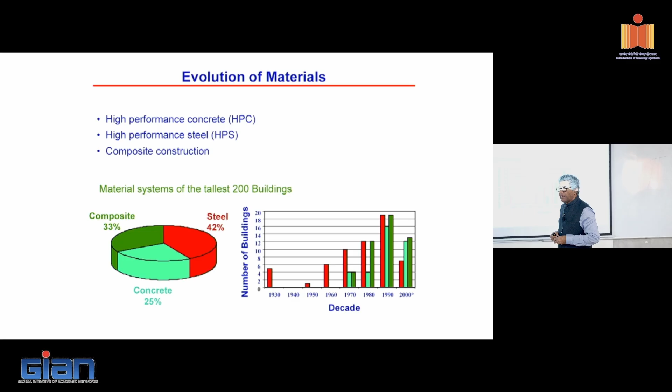Now we'll move on. You all know about the evolution of materials. We have been talking about normal concrete and high strength concrete. Now high strength concrete is dethroned. Nowadays the buzzword is high performance concrete, and high performance steel composite construction.

These are the materials which are powering us to construct tall buildings, because they get more and more loads and need to be able to take them. Tall buildings have the usual dead loads and live loads, which I think all of you have been taught about. But tall buildings also bend, due to the wind.

Take the Burj Khalifa, earlier Burj Dubai. That structure bends by about 1.25 meters at the top level, and daily it swings. For about 160 stories it is made of concrete, the remaining 80 stories made of steel, because steel can give the performance for ductility as well as fatigue. Considering those considerations, we went for steel for the upper structure. After the building was built, we kept some people within the Burj Khalifa structure on every floor and made the structure move like this. It has virtually moved right up to the top level.

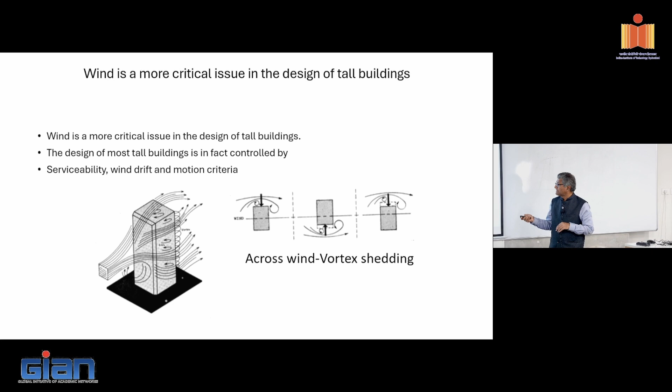That is the performance of the structure. Having known this, we need to know much more about the wind performance of buildings. The wind vortex phenomena take care of much of the behavior in tall building structures. I'll just give you brief information, not go much into the details, since it won't be possible to cover.

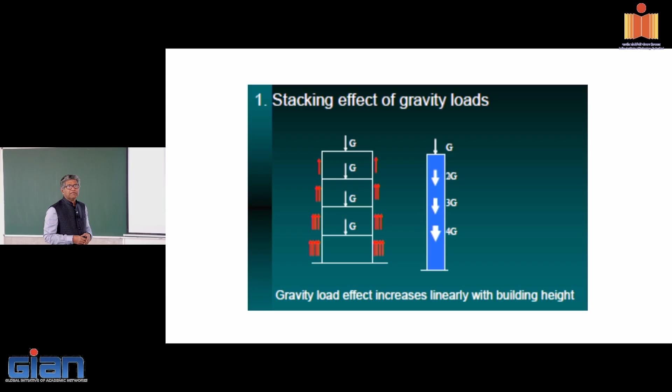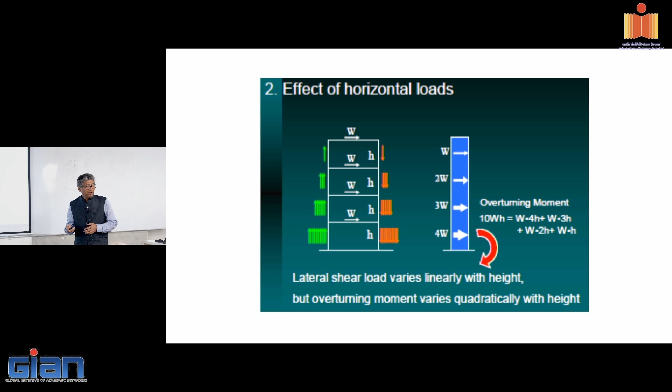For any tall building we design, we normally know what loads are coming up. In spite of all the computer analysis, we estimate what load is going to come down, and what the earthquake load is, taking it as a stick model with the summation of flexural rigidity EI values. We put the stick model, apply the load as a cantilever, and understand what moment we are going to get, what deflections we are going to get. That will nearly match the computer result, with about a 10% difference. That's what we do in all the structures.

And everyone knows about the shear walls criteria, besides the columns and all, because shear walls take the brunt of the wind forces and the earthquake loads.

That's the reason why we go for shear walls. I will show you some of the buildings in America or in Dubai, where I have worked for about 15 years, and how the buildings have come up.

Most of the time, if we talk about a 70 by 70 or 80 by 80 building, they will usually have a lift and stair core in the center, and then the peripheral columns, connected with outriggers if there is a necessity, otherwise it's not required. This is how tall buildings come up, and Burj Khalifa is how the whole structure is made, with buttresses as we call them.

If wind force or earthquake comes up, these shear walls will take care of it. The central core itself also has shear walls which are able to take the load. This is how the whole structure is done.

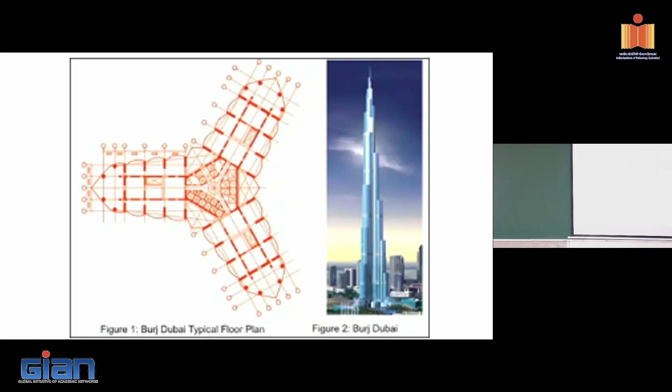But to give you the information, while the structure steps up and down like this, all this is taken care of by about 50 wind tunnel tests carried out at various levels. Because of the wind tunnel test data, the analyst comes and says vortices are forming, eddies are forming here or there. Every time the structure goes up, we try to stop it there and take it further, and he advises to raise the other side. We kept increasing like that, reducing the sizes.

All of us know that above 250 meters, no code in the world covers the building, no codal provisions. It's all done with wind tunnel tests, and we went ahead with the design of this particular one.

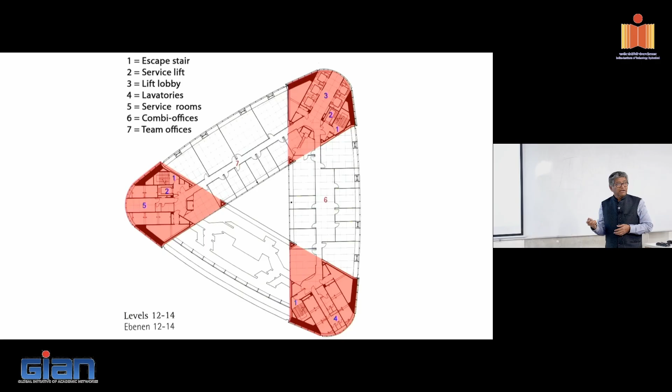You can also see some irregular shapes of buildings coming up. Even here, we have managed with shear walls to take care of the lateral forces due to wind and earthquakes. So that's a brief idea of what shear walls are and how they work. I'll now briefly run through the various technologies ongoing in the country.

Predominantly this is the one now being adopted by developers - monolithic construction. This monolithic construction is called Mivan construction, because Mivan is the fabricator who started supplying aluminum shuttering from Malaysia. That's how people started calling it Mivan, similar to how we call photocopying 'Xerox'.

And then we have insulated wall panel construction using shotcreting of concrete, light gauge steel or cold form steel construction, precast, prefabricated, and composite construction. I'll just run through this very briefly.

In 2010, we designed structures for the Bangalore Development Authority, stating there is no need for brick masonry. We convinced them to construct a 10-story building and a 6-story building with various thicknesses of walls. The beauty of this is you can pour the wall and slab together on the same day.

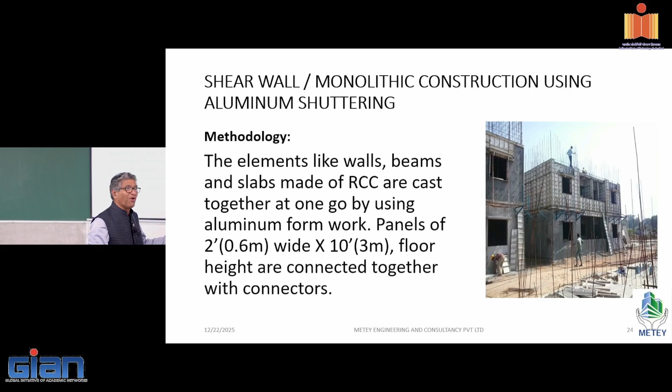It's self-compacted concrete, that's the beauty of it. There's no need for plastering later on. These walls are called load-bearing RCC walls, and they're as good as shear walls - they take the forces of wind and earthquake as well.

This is how we convinced the AP state government to build EWS housing under PMAY with this monolithic construction - they built about 3 lakh houses, and you can see these beautiful houses. We also advised them, similar to IIT Hyderabad, that there's no need for painting, but they said people still need to reach the stage of acceptance, so it's better to do the painting. That's how we did the painting on this.

For all these buildings, we raised the bar of specifications by providing vitrified tiles and UPVC windows rather than normal buildings. So we told the Chief Minister, let's stop constructing ghost houses, let's build durable houses so people can stay in them and remember your name for generations. That's how the buildings have come up.

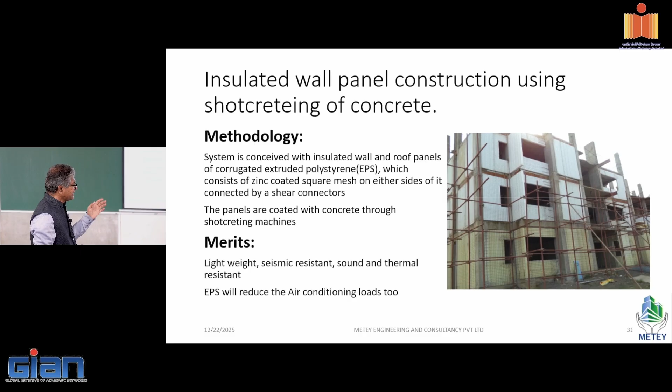They are the steel manufacturer, building a structure using this particular polystyrene with reinforcement on both sides, impregnated through. We said this can be used as a shear wall itself, an RCC wall. We demonstrated and tested it, and it worked fantastically well. With this, they have built 4-story structures with the help of this technology. You can erect it, and after shotcreting and painting, you don't see the difference at all. But there is a massive 4 degree centigrade temperature difference between outside and inside in summer. That is the beauty of these structures.

Light gauge steel, again for Jindal Steel and Power Projects Limited, JSPL, for their employees housing in Raigarh, we have built a 4-story cold formed steel structure, putting rock wool inside and then cement particle board.

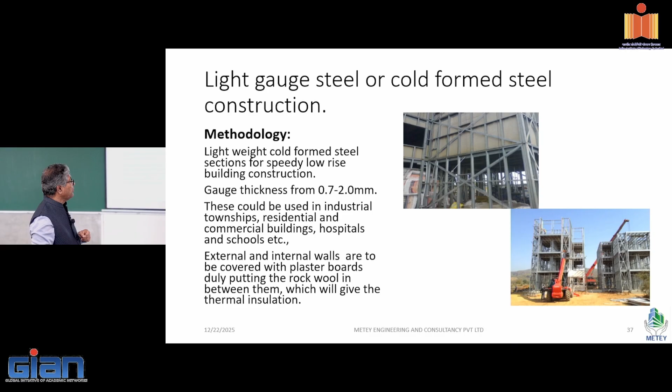Abroad, when you look at these buildings, they put some 2 layers of plywood as a flooring unit, but it gives sound when you walk on top. So we decided to put a concrete slab on top by using a deck sheet. That's how these buildings are built. You can also see this is the bracing with cold formed steel. Cold formed steel is usually used up to 0.7 to 2 mm thickness, with channel sections, and then cement particle board on either side with rock wool inside, which gives sound insulation as well as fire insulation.

And then composite construction. This is again a well-known concept. America and other developed countries do a lot using steel instead of concrete - steel columns, steel beams, and then the deck sheet, and on top of that, concrete.

Instead of this, now we have started putting the precast hollow core slab also. Instead of the deck sheet, we started putting the hollow core slab on top of the beam. I will show you some more ideas which have come up, called delta beam, where we are putting the hollow core slab at the bottom flange, even giving you optimization in space.

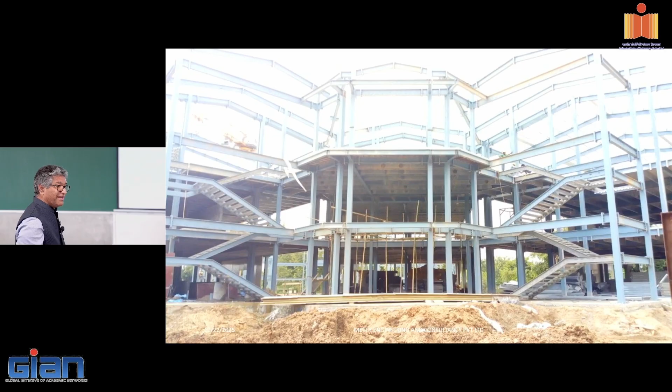So this is how we built one structure in Numaligarh, in Assam, where people wanted the building in 6 months, for both a nursing college as well as hostels. There you have the refinery there, right.

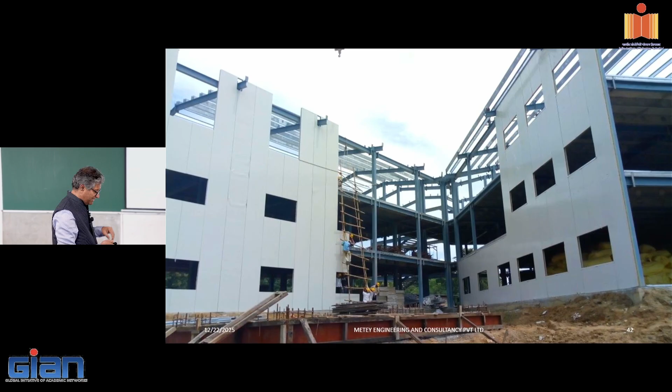Nursing college and hostel, we built this building, and they wanted it in 6 months. So we constructed this - you can see this is a 12-meter high dry partition, no concrete or anything. You have rock wool inside, and it's a galvalume sheet on both sides. We fixed this 12-meter panel, made in the factory in Delhi, shifted out to Numaligarh, and simply fixed it - 12-meter height at a stretch. This is the beauty of it, but it's totally a drywall construction. We have used only brick masonry in the toilets, because in the toilets it's not a good proposition for drywall.

And then there is another smart guy, a postgraduate from ISB Hyderabad, who thought of doing something different in construction. He took me once to Australia to see what is called perma wall form construction, which is coming up. This is made with plastic - you have this plastic sheet on one side and the other side, and then you put particular ribs inside. This is also a technology which has come up. We have already built some, and he is doing quite a good number of buildings for Mahindras in Chennai right now by putting up the fabrication there itself. What you do there is this PVC form remains in place.

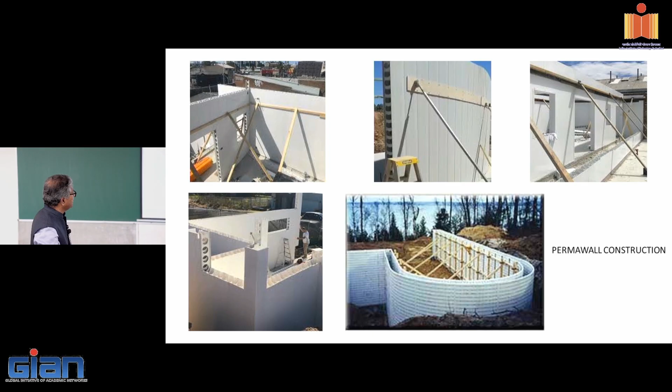Whatever color you want, you are just pouring concrete and putting the reinforcement into that. It acts like a shear wall, nothing bad. So it is a stay-in form, and the concrete can be poured into that. These are the different ways in which you can build this. I've seen in New Zealand and Australia a lot of construction going on with this, and it is picked up in India also.

Glue laminated timber - anyone know about this? The name itself says glue is added between the timber pieces. By adding this, you can make a timber beam of size you want - 1 meter, 2 meter, 3 meter. We have designed one big shopping mall of about 100-meter column free space with the help of glue laminated timber, making a big truss. What you are seeing here, we have made a 100-meter glue laminated timber truss. There is a beauty to it.

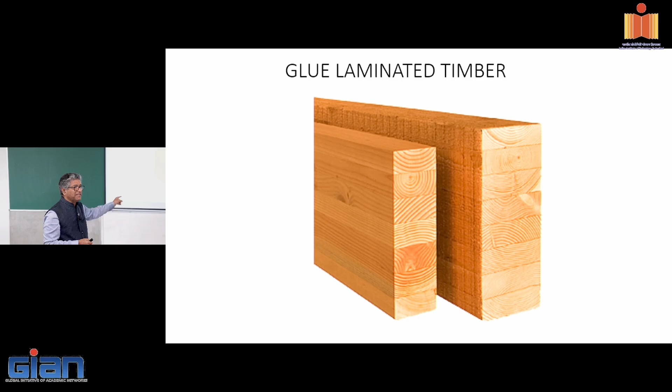For the Indian tropical weather, how is it suitable? Some chemical treatment has been done. New Zealand people will ask what treatment you need and how long it should be maintenance free, and they do the treatment and send it. Each piece is 45 mm, glued together with a strong adhesive, fantastically glued together. Thereby they are getting about 17 to 20 Newton per mm square flexural strength, whereas our teak wood maximum takes about 5 Newton per mm square - increased to 17 to 20 Newton per mm square, which is a fantastic value.

Using this glue laminated timber, churches are built very much in Europe, and swimming pools are also built. We have designed some swimming pools and structures, bridges in Dubai at various locations, and resorts and hotel places like that.

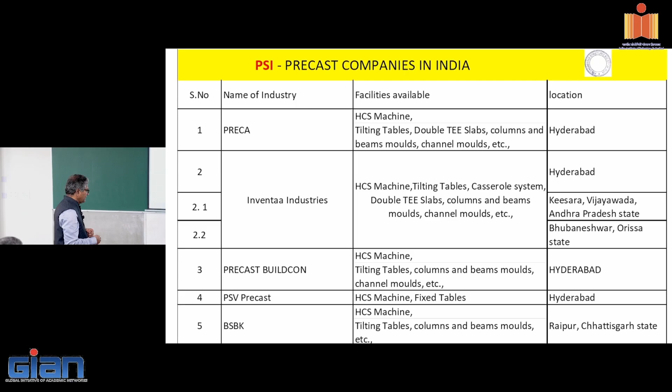In India, what is the issue regarding termite treatment? This is termite treatment - chemically treated and sent such that the termite cannot penetrate. The specifications exist. Most termite treatments are limited to 5 or 10 years only, right? No, here they are giving a guarantee of about 20 years. So New Zealand specifications ask you how long you want this.

We have to specify what the maintenance period is also. One important thing - while working in Dubai, whenever the client comes to our office, we ask him first, by giving a checklist, what is the first maintenance period you are looking at - 5 years, 10 years, 15 years? If he says 15 years, we choose the material accordingly; if he says 5 years, the material will be less costly. That is what is missing in India - that is what we should be doing. There, of course, they're much richer guys, they can pay for it. Some people will say 10, 15, or 20 years - thereafter you can forget about the building and touch it only for maintenance. That is the way we provide the specs, and then he signs on that.

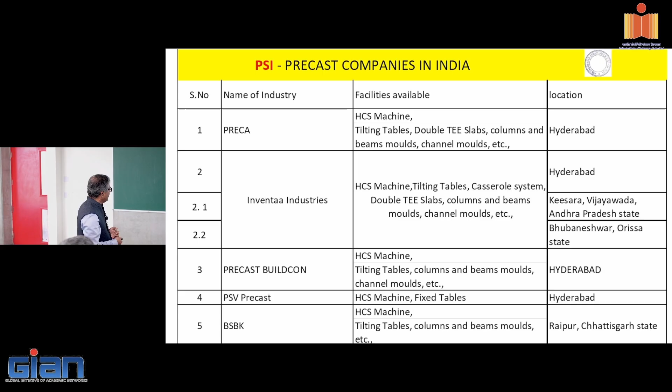Now we'll come to precast. With our effort through the society, we have seen that about 50 companies have come across India - that is what we have done from our side. So many companies are there across India like this, and some developers have also set up for them, like Sobha developers, Brigade developers, My Home in Hyderabad, like this.

So what is the beauty of precast? The beauty of precast is large column free space. We can provide floor slabs for about 15 to 20 meters long - that is the beauty of it. These pre-stressed precast slabs, solid or hollow core, are different slabs as we are going to see now. That gives us a fantastic column free space which is needed for shopping malls, office complexes, and all those. Here you can see this is a double T slab in the shopping mall.

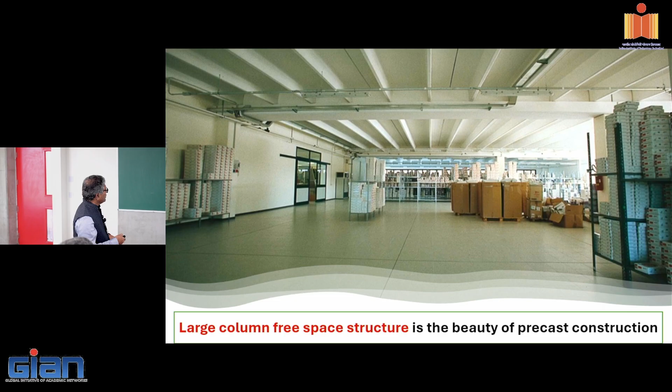It is also extensively used in parking structures, such that car parking becomes easier. The beauty is that I could see a column here at 10 meters, but this span is about 25 meters, with a double T slab. That's the beauty of precast, so that the architect can provide the racks wherever he wants.

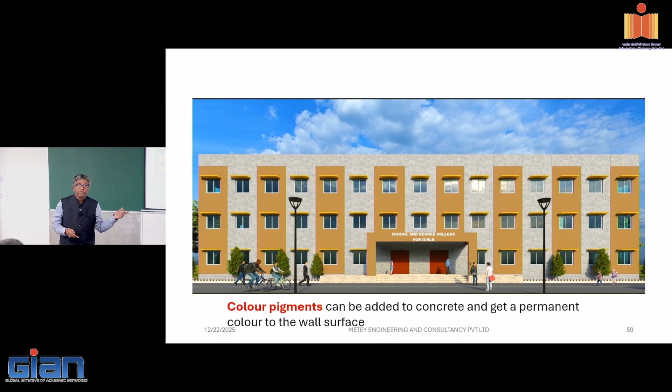Now we are also putting coloring compounds, so we can do the precast with whatever color you want. Abroad, the facade elements are most of the time done with color. There is a beauty to it, no need to do painting, right? So this is how the mushrooming of buildings in Dubai has come with precast technology.

While I was there in 1995, from 1995 to 2000, even a 30-story structure was taking about 6 years to build in Dubai. By 2000, even a 60-story structure was being built in about 2.5 years. That is the result of precast. In 1995 they were predominantly using conventional construction, putting up formwork and all, which was taking time. By 2000, precast companies had come from abroad and set up, and the mushrooming of structures came fantastically. There is the beauty of the advent of precast.

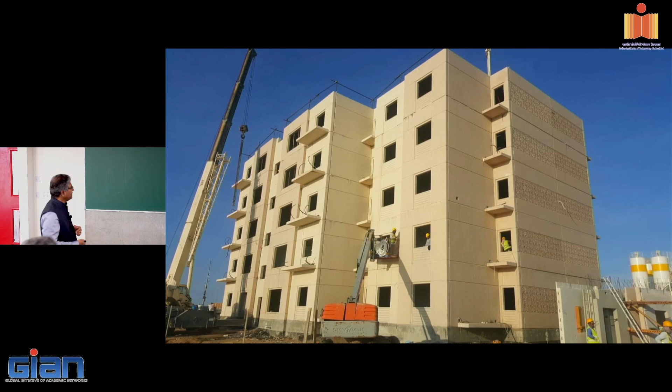Now this is how buildings are built abroad with beautiful coloring compounds. You can see the beauty of it. It looks like some stone has just been brought and put there. That is the beauty of the precision and quality of precast buildings built there.

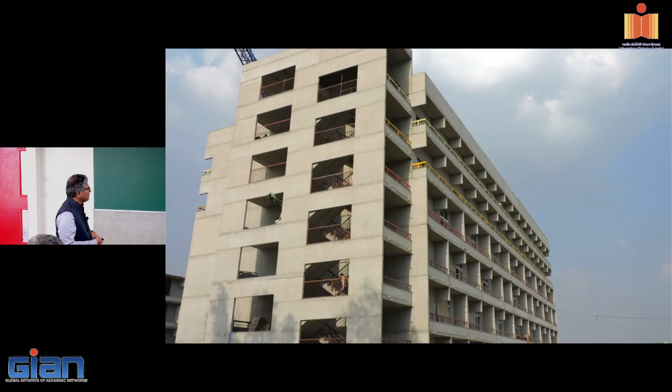Connecting to that, in India also we have built this - you can see this is the Jindal University at Sonepat. What the architect has done here is similar to IIT Hyderabad: he has exposed the concrete as it is, and only put color on the railings.

This is how the interiors of the corridor look, but only inside the rooms have they done some painting. Other than that, the gray concrete color surface itself is good enough, and concrete is most impermeable - water will not penetrate, so there's no need for plastering. That is the beauty of precast.

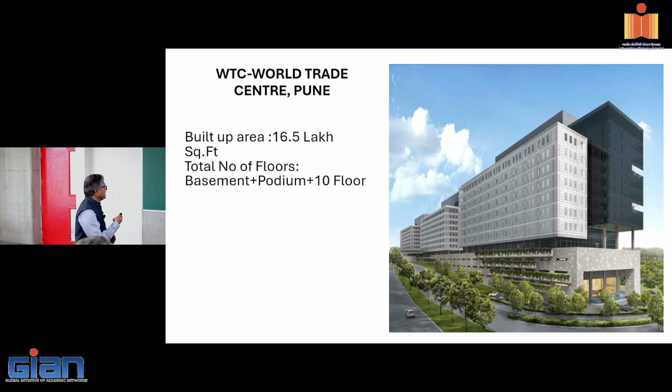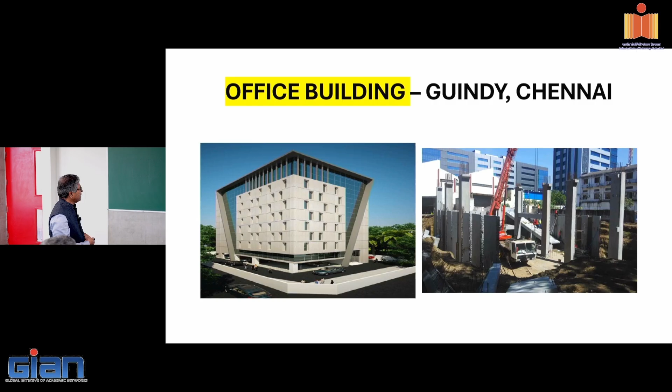Now we have the World Trade Center in Pune, 16.5 lakh square feet built by Precast India Infrastructure. We have a building of 1,65,000 square feet delivered in 4.5 months in Hyderabad - a BDA project done by BG Shirke. A hospital building was built in just 4 months; the time period is reducing. Novotel Ibis Combo Hotel in Chennai was built totally in precast by BME Precast. A canteen block was built in 38 days, and a school was built in 28 days, just one month. This is the beauty of cutting short building time.

This is one beautiful building - Infosys thought the building should not look like simple boxes but should have some architecture. It's just a parking structure, but they employed 3 architects from America, Germany, and the UK, and selected one design to apply. It looks like a honeycomb from outside, but the building is 4.5 lakh square feet, with a basement plus 10 floors, and it has precast columns and precast slabs.

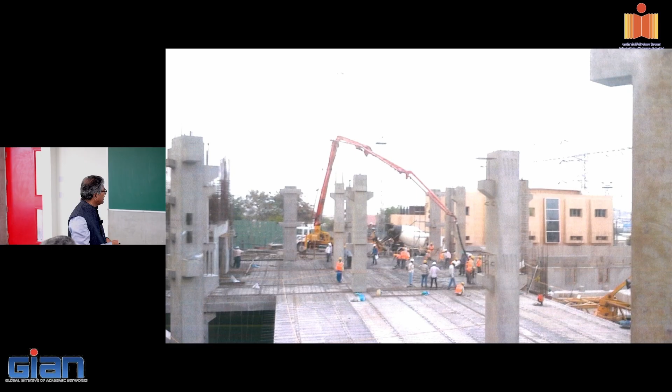You can see the corbels and so on, but they also thought they would not be able to catch up with time if everything was precast. So they did the lift core and such in cast-in-situ, but other elements they did in precast, because they were transporting all the elements from Pune to Mumbai - they could only get them in at night, not in the daytime. So these are the elements you can see here - this one is concave, the other is convex, through which air will pass into the building.

You will get the lighting in the daytime too, no need of lights in the daytime. That's how the concept is taken up. And then they are simply put into the...

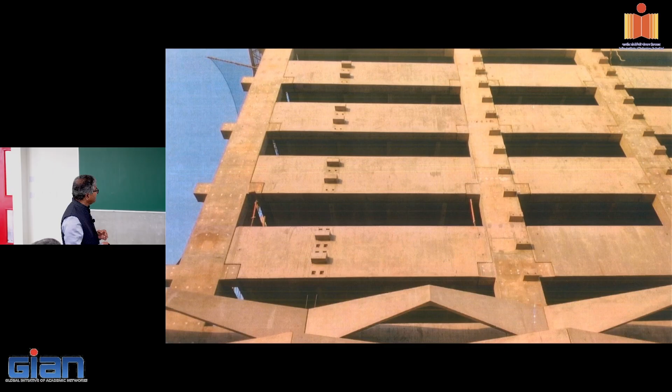These are the fixtures provided again to the precast beam. This element will just go and get locked into that, in a free manner. So this is how the building is, a fantastic building. This set of buildings can only be done in precast. Cast-in-situ is absolutely impossible, right? This is how the buildings are.

We'll just move forward. I think you have already been taught about this. I'll just very quickly run through the way forward, the way I want to deliver it.

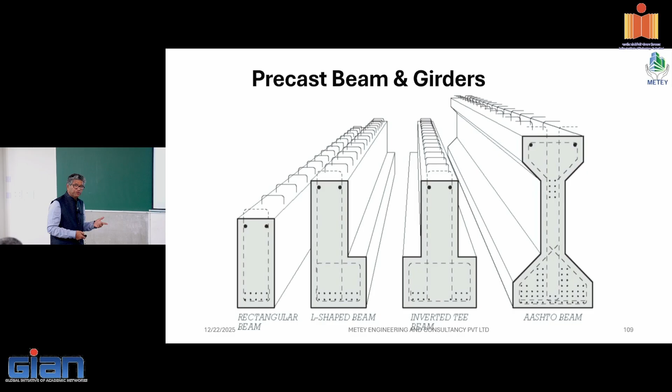So in the design of precast walls, we provide sleeves such that you can do the grouting. At the slab level, we leave the reinforcement such that it can be tied with the structural topping. Then we can do a 5-story precast column, or a 3-story precast column, leaving the reinforcement there for the beam reinforcement to come and join.

So in India, we are promoting doing the joint only with cast-in-situ. Cast-in-situ, no mechanical fixture is allowed. That's how you can see that.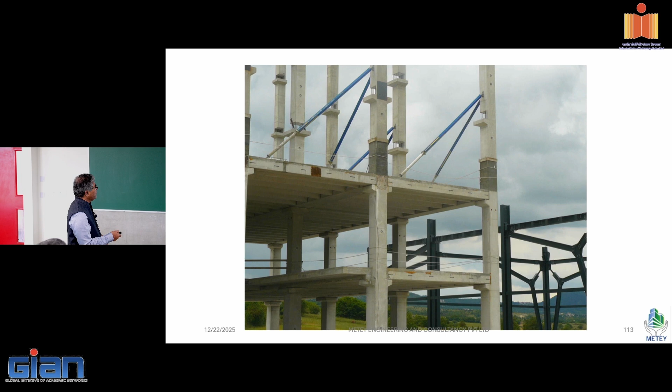The beam will come and rest on this corbel, but the beam reinforcement will go into this column. The column is already a 3-story structure, connected here, again a 3-story structure. But at every beam junction of the 3-story precast column, we have left it open so that the beam reinforcement can come in. Then we can provide the shuttering with a bell mouth and put the concrete into that.

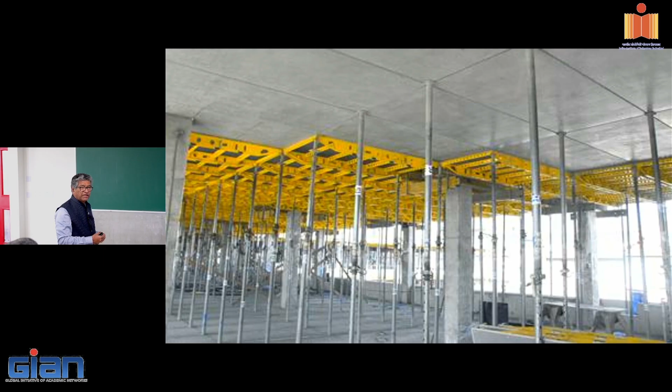This is how it works, but most of the time in conventional construction, a lot of time is taken for conventional shuttering for the slab. Conventional shuttering needs lots of carpenters. Whenever we do it, to take it out requires a lot of time, 10 days, 15 days, like that.

So in order to avoid this, what we have got now are different types of slabs. In precast, we call it a hollow core slab, but in conventional construction we have also come up with a system using balls to save concrete within, and we have grid slabs, and PT slabs, like these different slabs are coming up. There are PT slabs, which are used by developers for office buildings and such. It is also much in use in Hyderabad and elsewhere throughout India.

But we are dealing with the precast hollow core slab. Again, precast hollow core slab - why is it hollow? Anyone have the idea? Why is it hollow? Why do we make it that way?

To remove the... to reduce the dead load. To reduce the dead load. But why do we have to make a hole? What are the advantages? What are the disadvantages?

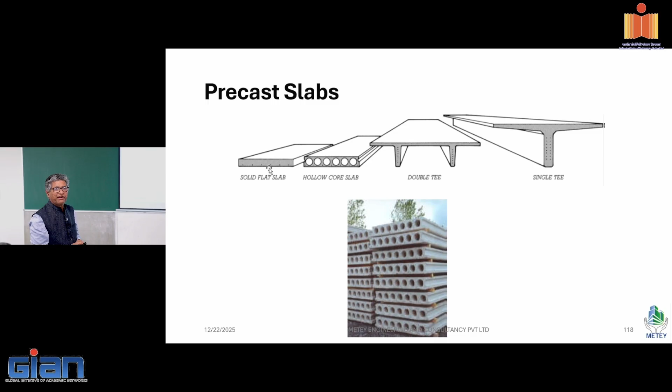One simple thing is, below the neutral axis, we don't care about the concrete, so we are taking the concrete out from there. Only the steel will be there, giving protection to the strands that we are keeping. The top 35mm, whatever I am putting, is sufficient for my compressive strength. There is a simple philosophy that they have adapted - they invented a machine and then started producing the hollow core slab.

So this is how the hollow core slab goes into that, and then we provide the structural topping. You have been covered about this already, so I will not dwell much into that. This is what we are talking about - your stress block which comes in there, we can take out that particular concrete here from that point.

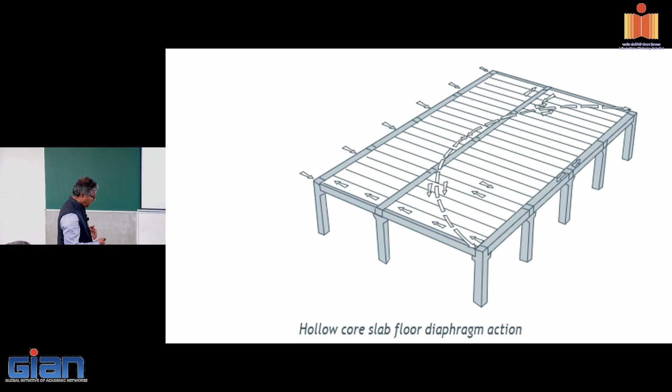Previous slide. You want the previous slide? Previous one. Still previous?

What is the problem, sir? I can put any slab, just like the normal slab, we can also put a hollow core slab. It's a one-way slab, hollow core slab is only a one-way slab.

Now, when we are talking about Mivan construction, what is happening is that the slab load is coming directly on the wall. Every millimeter space of it is getting the load. It is like a UDL. I already said it is a load-bearing RCC wall, right?

Similarly here also, when we are putting the slab over the brick masonry, that takes a UDL form. The load of the slab is distributed and every millimeter run of the brick wall will transfer the load.

But there we'll be having connection between the wall and the slab, sir. But here only slabs will be connected. Okay, good question, I will come to that as we go through the steps. Very good question, and now I could understand your question. So, this is a structural topping which eventually gives you the diaphragm action we are looking at.

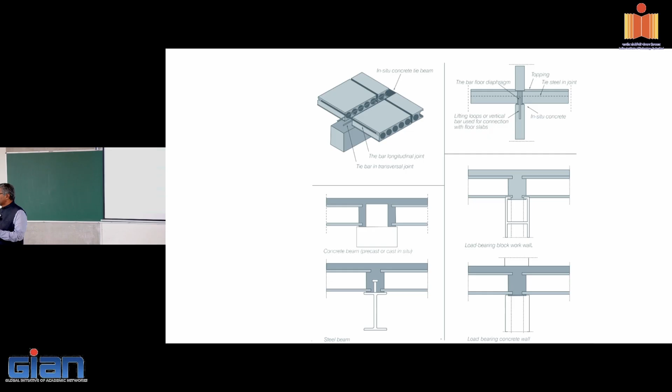And then there's the various connections. Here we have these connections. Over the brick masonry also, we put this to an extent of 80 to 100 mm on either side, and then put these tie rods inside, and then pour the concrete. Then the slab is together, all individual units. That's it.

This is how this precast hollow core slab unit works. You can also make the openings if their design is perfectly done. This is what we do to run the services and all that.

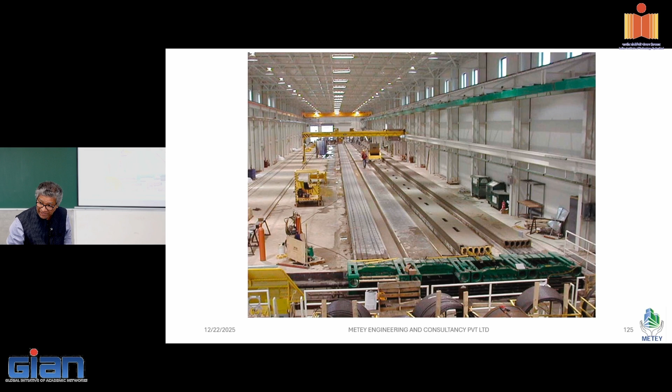How many of you are from Hyderabad? Have you seen the precast company factories here? Yeah, there was a field trip last Saturday, day before yesterday. We went to Precast. Oh, wonderful, it's a good company. And before that, Mr. Sridhar Rao spoke about Elematic.

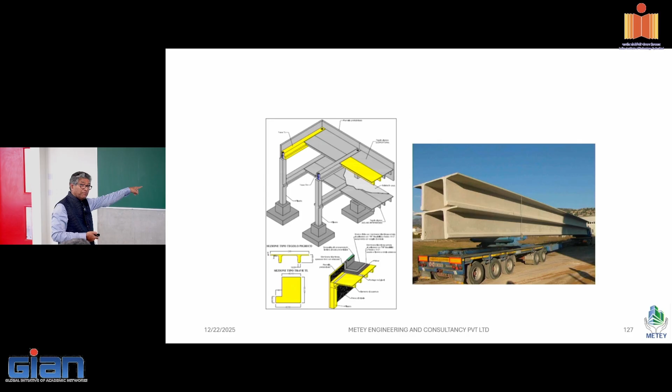That was an online presentation, talking about the construction of hollow core slabs. Well then I will quickly run through this. This is a double T slab, these are transported like this. Precast have done this double T slab for Nizam Club at Abids, at the assembly point. They are the only people who have done this.

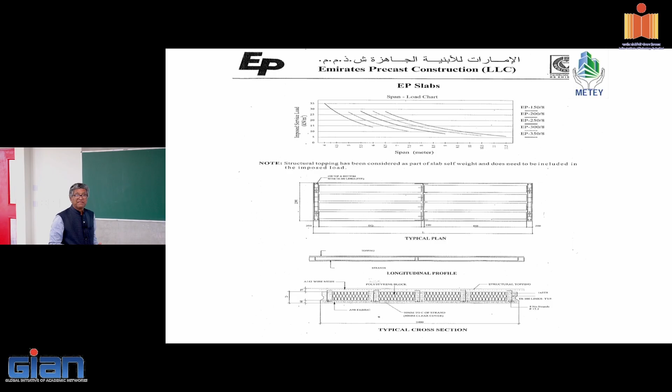This is also widespread in Dubai, right? So there are some details of that particular one. And then we have the normal castage too, it can also be done precast. There is no need to put any pre-stressed wires or anything into that, anyone can make this. This particular thing is also called a filigree slab. They again put about 50 to 75 mm concrete, and the remaining thing they will pour after installing it on the sides.

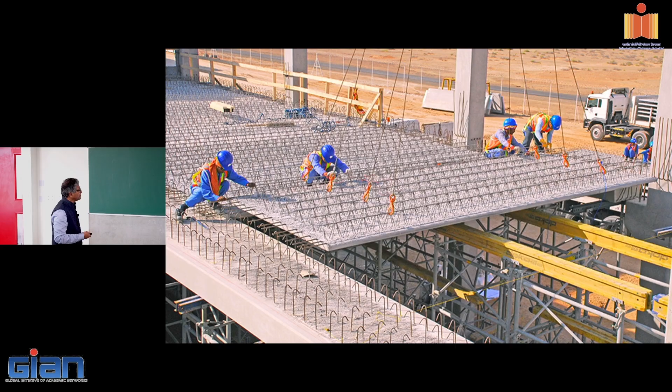So what is the advantage we are gaining? We are not putting any plywood, but only the runners, timber battens, to support, because it's only 50 to 75mm. For the 10-meter span, it will try to bend, so we just put these wooden planks to give the support. Thereafter, we pour the concrete. This is how these particular elements are.

People are also doing two-way slabs, two-way precast slabs, by putting it over the elements and then running this reinforcement.

All right, carry on, carry on, carry on.

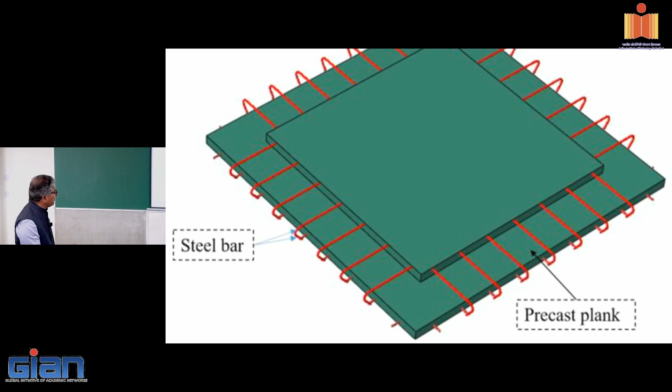A two-way slab can also be done like this, with a half cast all around. Why half cast all around? I can continue my reinforcement here. Whatever reinforcement has come here can be continued after putting it over the beam or walls. So this is also in practice, which you have been doing.

One of the buildings in Hyderabad we have done is stilt plus parking plus 9-story precast building, again EWS housing at Dundigal. It's a 550 square foot building.

So what we have done here is, there is no need to be totally precast. We used load-bearing precast walls, and then put about 7-meter hollow core slabs on top of that. All internal walls, the contractor can do as partition walls, non-load bearing. We allowed them to be built on the hollow core slab, which can be designed to have these non-load bearing walls.

This is how this building is designed, and about 14 towers we have done it, and from your ETABS you will get these values, which is fine and fantastic. This is how the buildings are built - 11-story buildings in Dundigal.

This is in Amaravathi, Capital Region Development Authority. Again, they have taken a call that it should be precast buildings, precast walls at certain locations, and they wanted to leave it open and decide whether it should be a wall or a glazing later. So they have done this precast column with corbels and all. The structure is done by Preca again.

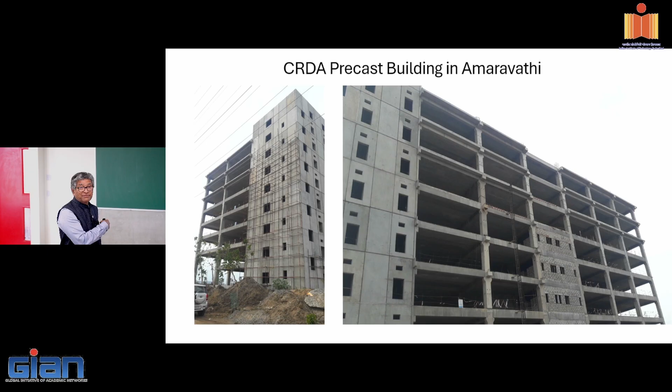From Hyderabad, they have shifted to Vijayawada, about 300 kilometers. But then the building is built very fast. This is how the building looks after its completion.

Now, buildings in NCR. Sometime back, DRDO people called us stating that they are looking for durable buildings and faster construction in about 18 months. 8 lakh square feet we have delivered in 18 months. There is a beauty with precast.

So we got a call. I went there from Hyderabad to Delhi, and these are the buildings. Some of the buildings are residential buildings, meant for DRDO and especially for the RAW intelligence people to stay within.

Here also you can see there's precast walls with hollow core slab put on top, but when buildings are like this, you can experience a bit of torsion and other things which need to be controlled. These buildings, whatever we have designed, about 5 types, are all peer-reviewed by Professor KVL Subramaniam in Hyderabad.

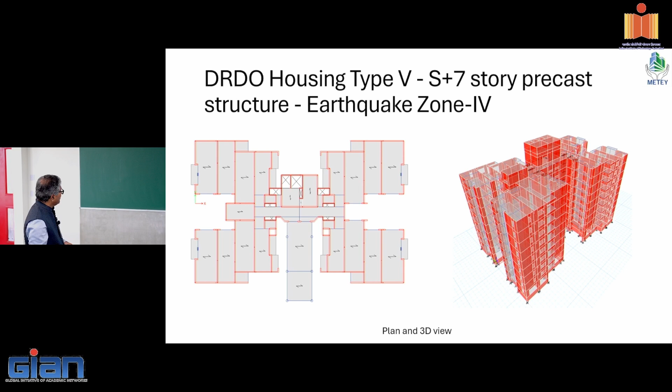Because there's a modal mass participation - sometimes if the building is almost symmetrical, not a problem, very symmetrical and easy. But the previous building is a bit of a difficult building, where you get the torsions and all.

And then I'll show you some more non-torsional buildings also. Even this building is a bit tough - you can see the architect struggles to cover his areas, to minimize the balcony areas, because he has been given a task that a type 5 building should not exceed a certain square footage. So he struggled to put the area.

But then again, in this building, it is not only shear walls with shear connections. For some walls, we have gone with monolithic connections also. So a building can have shear wall connections, shear connections, and monolithic connections.

Why 2? Why not 1? Because sometimes I have to give a longer wall. Let's say you have a wall of 10 meters long - 2 5-meter sections are clubbed together. Then your moment of inertia of the wall is more.

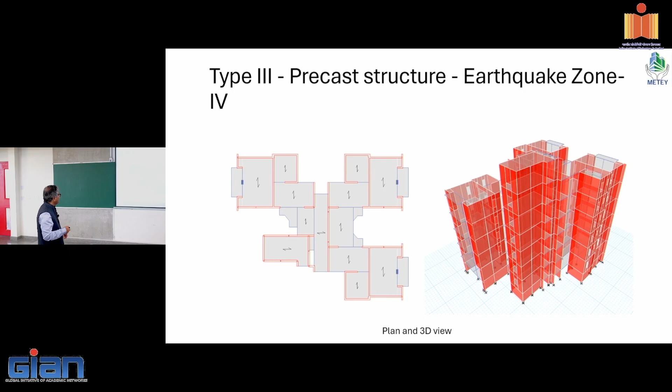If you say only 5 meters, it's all the time bd³/12, your length is only 5 meters. If you say 10 cube, then you get more flexural rigidity, so resistance will be more in resisting wind and earthquake forces. So in this building we have done like that, but the contractor cries whenever we provide a monolithic.

This is how the buildings are built in DRDO, the precast buildings. Buildings after completion - this is one of the buildings done by my friend Bob in Ghaziabad, again a 12 to 16 story building, totally load bearing and hollow core slab buildings.

And then we have done one building in Hyderabad, a project called Magic Breeze. This building is a duplex story building where each one is an apartment. Like this, you can see from here to here one apartment, and again from here to here one apartment. Like this is a duplex story apartment, but the building is planned in this manner.

But then we had a chat with the architect saying that it needs to be connected here, otherwise these two independent buildings are difficult to control with the torsion and all. So we need to understand how to control the torsion of the building and then negate that particular aspect. And this building had one particular requirement.

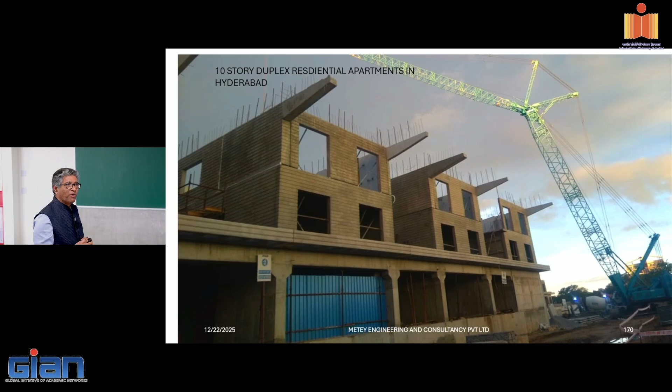You can see that from the wall we have taken a cantilever beam outside, from the wall itself. The wall is a load-bearing precast wall. We have taken a cantilever beam out of that. But what is it we are doing? The gentleman wanted

for the plants to be set up where his requirement is the plants can grow 10 feet tall, and then he wants to put up a huge pot into that with soil, about 1 meter high with soil into that, which is a tremendous weight. So we decided let there be a precast element which can take the brunt weight of the pots, flower pots, which can grow over there. That precast element we put over this cantilever element.

Now you can also see there are certain grooves. He said, why does the wall have to be plain? So we put in the formwork itself these particular grooves by putting square tubes and then poured concrete, and automatically the grooves formed. This is how precast can be done, whatever shape you want, whatever design you want.

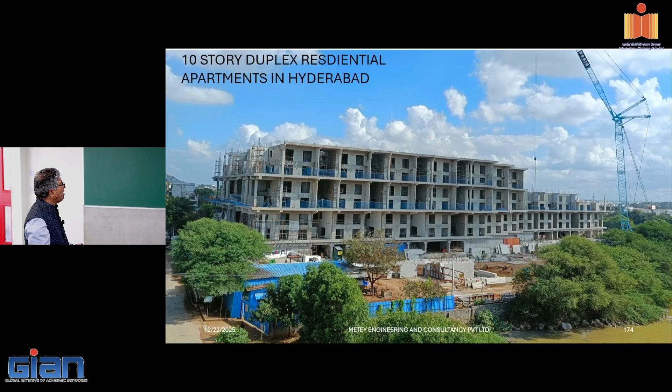Then commercial and industrial structures. We have done one building for industry structures where the government of Andhra Pradesh wanted a building to let it out for the footwear industry, but they don't know how many people will come and how much space to be occupied. So we said 12-meter slab, 36-meter span, you can construct a wall wherever you want. So a fellow can take 12 meter by 6 meter or 12 meter by 12 meter, whatever he wants, he can construct it. And the building is longer, people in the footwear industry like it.

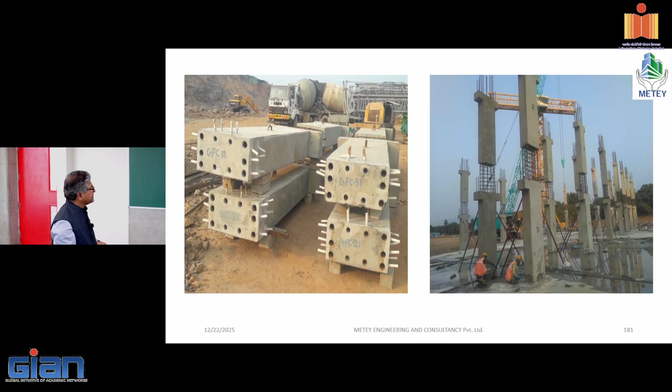But here again, this building after design is stable enough when we have provided the Dextra couplers. You have seen the Dextra couplers at Precast, you visited the other day. Growtech coupler provides a big development bar and all that. What we do here is called a Dextra coupler.

Usually what happens, if you are providing a 25mm bar, if I have to give that lap length to a 25mm bar, usually approximately 50 times the diameter, you have to lap the bar to develop the bond. But here there is no connection between this top bar - the bottom bar will just enter into this bar and then we send the grout. This grout has a strength of about M80 to M100, and its bond strength is so high, about 8 to 12 MPa, that the bar is breaking but the grout is holding it because of the bond strength.

We have tested it and then started using this. So thereby, a 25mm bar coming from the bottom will just enter into this by 200mm. That bar will be threaded at the top and goes into this CI shank. This is a cast iron shank of 60mm diameter. The grout will go and hold it - that is the beauty of it, such that there is no congestion.

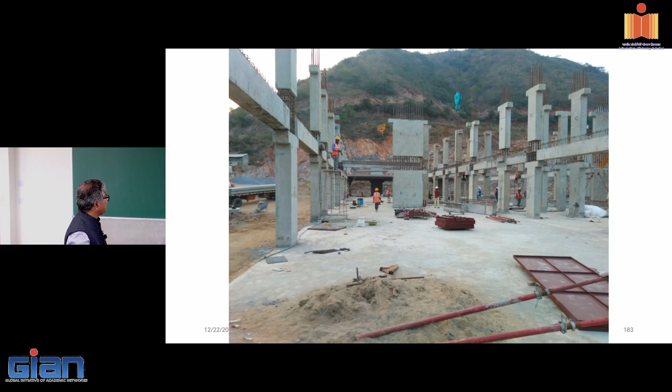Into this building, we went with 2-story precast columns and then allowed the precast beam reinforcement to join into this junction from both sides. That's how it is, and then we have concreted. 2-story columns of about 1 meter long by 400 wide is a beauty, such that we can save time and construct a 6-story structure faster.

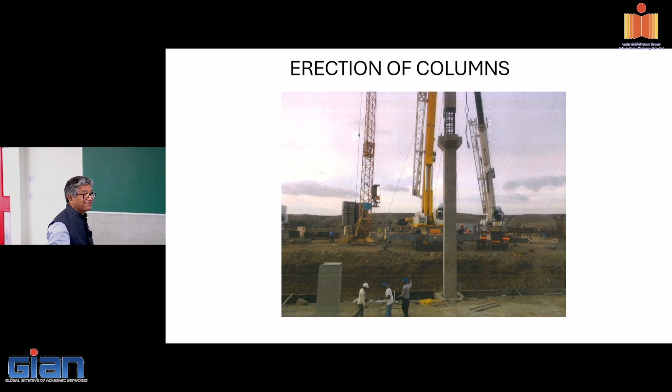Now you can see one of these buildings from Pune, about 350 kilometers away. These 1 meter by 1 meter, 2-story columns, about 9 meters long, have been shifted, lifted and placed over there into a precast footing, where there is nothing at all, 350 kilometers away. So all the elements have gone there. Whatever they are doing on site is only micro concrete or grouting, which is easier for them. The factory was in Pune, 350 kilometers away. So that is the beauty, precast can go for miles. You can even build precast compound walls with footings.

We have done one pharmaceutical building. They wanted it in 6 months; we delivered in 7 months. Even that 1 month delay was because dewatering came too much in their foundations, which they had not anticipated. But there was only 1 month delay.

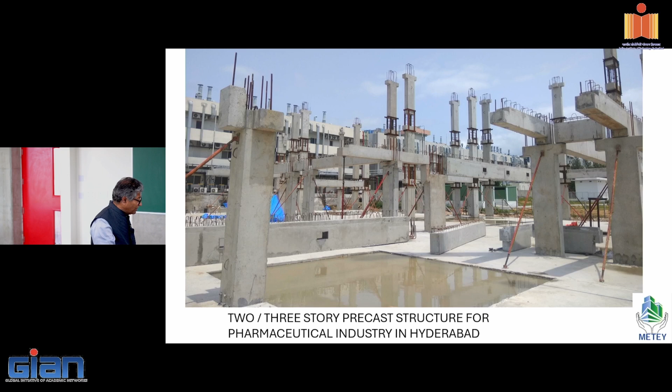Here you can see a 3-story precast column, and a 1-story precast column where a cantilever beam is projecting out. We have used a 1-story precast column, and the reinforcement coming out, when the beam comes and sits on that, exactly matches. That is the precision to which you have to develop the drawing and do the casting in precast, right? That's how these elements are done. This is a 3-story pharmaceutical building which the architect will later cover with his beautiful ACP cladding.

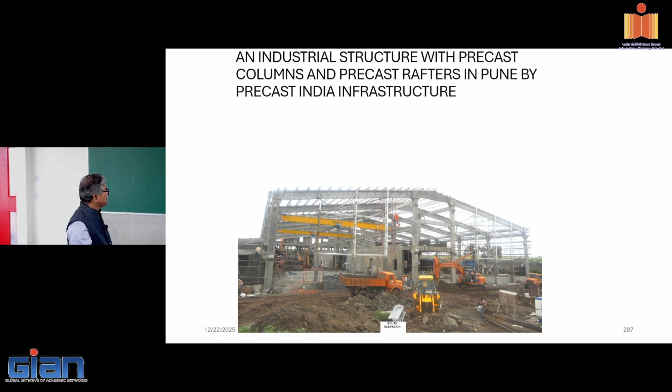Even industrial buildings are a beauty to see, how nowadays architects are giving beauty to the labs. Into the industrial structures also, removing the steel PEB buildings, we are going with precast columns, with corbels, with pre-stressed precast beams, but on top we are providing Z purlins and galvalume roofing sheets, because that is cost effective and cheaper on top. Hollow core slab is heavy dead weight, no need to put that cost also. So this is one way which we are going into.

This is a Coca-Cola factory. Here they have done an 8-story, 24 meter high precast column, weighing about 88 metric tons. They thought of doing it every 3 meters of pour, but then Coca-Cola was told that we can erect this particular thing as one piece. Each column is 88 metric tons and 24 meters high, and special trucks were formulated for that, and then they lifted it and placed it over there.

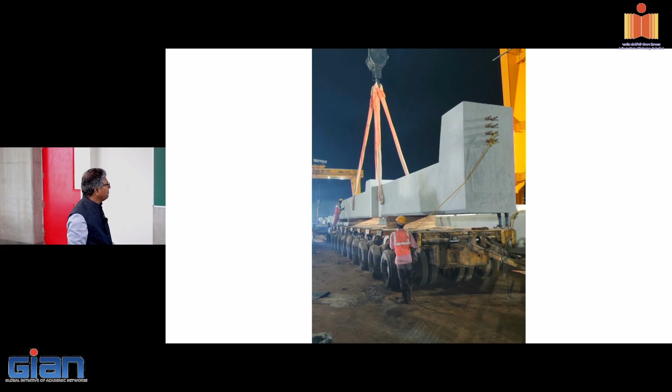I will show you again a 28 meter long precast beam, which is 132 metric tons. So the beauty of precast is how long and how big I can make it, such that I need not attempt too many elements to handle. If I keep on making every 3 meters a column, there are too many elements to handle. Let me use a bigger crane, lift it and place it there, then the building will go much faster. So this is how the elements are built.

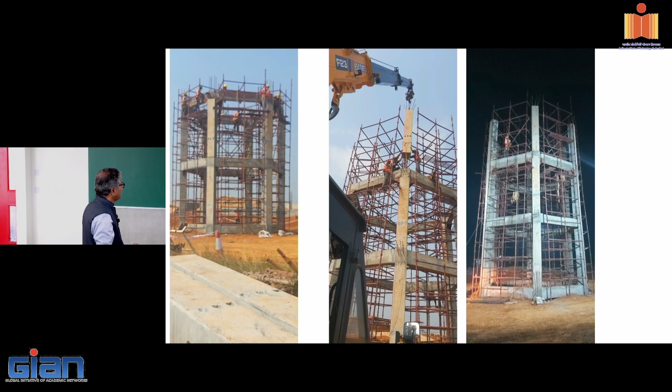Again, parking structures, even we are doing precast water tanks in Odisha, just to convince the Odisha government. We said we will do this column right up to the top, just like the way a cast-in-situ structure goes, immediately it shows like that, later on you can go. So we can do this precasting like this also. Even by doing it like this, they have saved about 4 months' time instead of putting shuttering and all that.

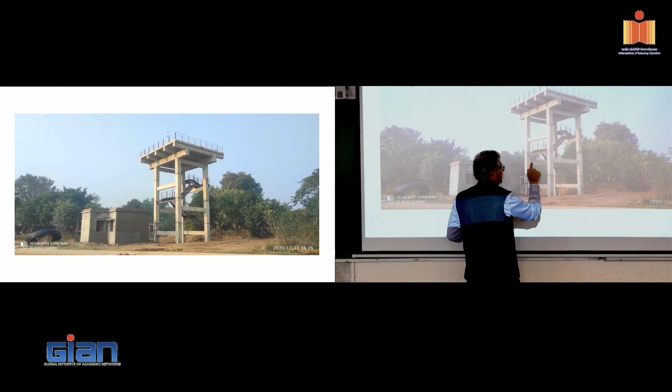So this is crisscrossing, right? This is one good way of doing it, and we are able to construct this whole thing as an H frame with the dowels going in, and on top a precast slab again, and on top they are putting the galvalume tank, GA tank. Nowadays lots of GA tanks are coming up which can give 25 years warranty. Throughout India we are also using this for a number of structures like this.

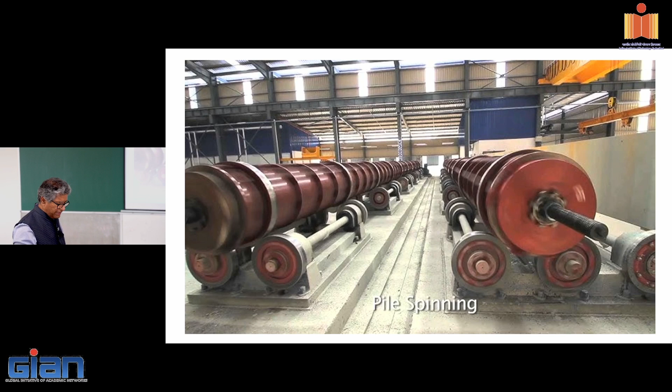Piles are also precast. We have a factory in Narsapur, Andhra Pradesh. They are also doing precast piles, precast spun piles. It is hollow inside - that's what spun means, this is how the element comes in. They put the concrete and then spin this particular thing at very high speed. Then the concrete will segregate and go to the edges, forming the hole inside. With the help of this they can make 600mm, 750mm, different sizes and diameters, and this can be used for piles. We have used this for some structures in Andhra Pradesh.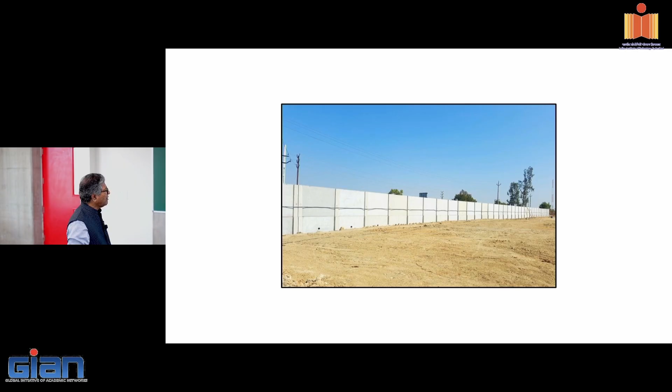This is how buildings are precast. You can make precast boundary walls, precast industrial structures - whatever shape you want, this can also be done, not necessarily cast in situ. This is an industrial structure we have done - precast structural steel beam, precast columns, precast walls all along. Sheeting comes on top, only for ventilation purposes. This is one type, and within that, if they want mezzanine floors, precast slabs can be fit in. This is how precast industrial structures can be done.

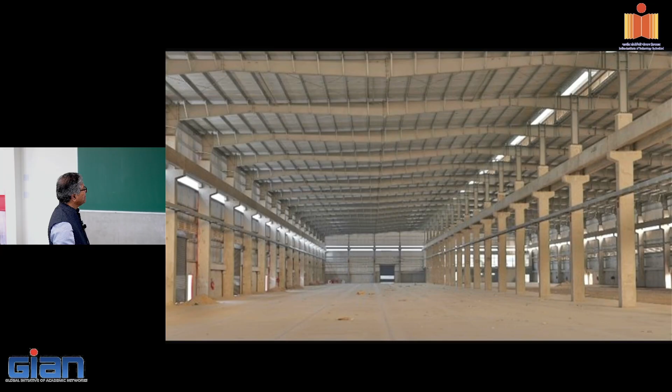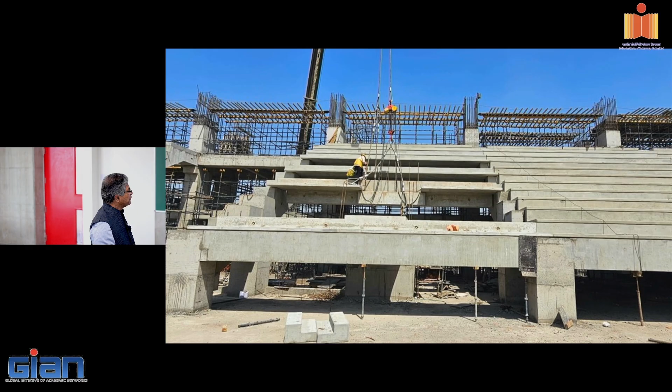This is again a precast factory for Nestle, who manufacture chocolates. Here you can see even the pre-stressed precast beam - we have put only the Z purlins on the rooftop, and on top of that the galvalume sheets come. This is in the sports stadium. It's easy to make an L shape like this and put it over the gutter. So the precast element - you can also make these precast beams come like that.

These structures are done in India, Ahmedabad. The trussless roofing system - again the whole structure is made in precast, only the roof is made in sheeting. How many of you have seen this sheeting? It does not have any steel beams - it's called a trussless roofing system. It has a profile, but the sheeting can span about 30 meters, 30 to 40 meters. The sheeting has also come.

Between Mumbai and Ahmedabad, the bullet train system is coming. The bullet train goes at such speed that it gives sound to the adjoining villages. So it was felt that at every village there is a need to construct a boundary wall to an extent of 1 kilometer on either side of the station. L&T have picked up a few precast companies in Mumbai and Ahmedabad, about 5 companies, and started putting precast foundation, precast compound wall to get it erected there. Their project is 5 years. So much precast - a number of precast companies have immediately sprung up at that location, and a number of entrepreneurs have set up there.

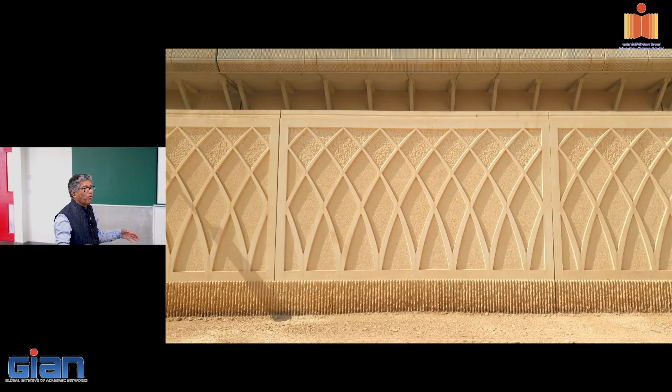Boundary walls - yes, we can also do boundary walls with whatever color you want, whatever design you want. Just on a table, pour concrete with coloring compound and you will get the design that you want. That's how precast boundary walls are made.

And this is Acotech light walls - there is also a factory. Has anyone of you visited Sri Lanka? Acotech Sri Lanka - because we had a presentation from Acotech Sri Lanka, they have come and given a presentation. We have a factory in Hyderabad also, and from Hyderabad they are supplying to Chennai, even Bangalore, and so many buildings in Hyderabad. All the non-load bearing partitions they are doing for offices and all. You can also visit this if you have time. I'll just skip this, and then there is one interesting thing.

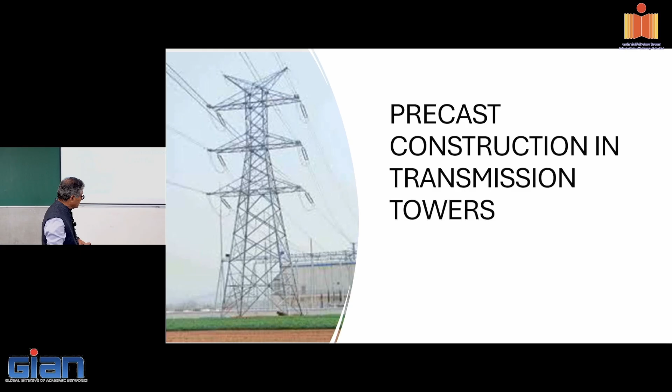This is how it's done in cast-in-situ: 6 meter by 6 meter foundation, then a pedestal comes, and from there the column shoots up, and from that column again the steel column shoots up at that angle. This is how the system works.

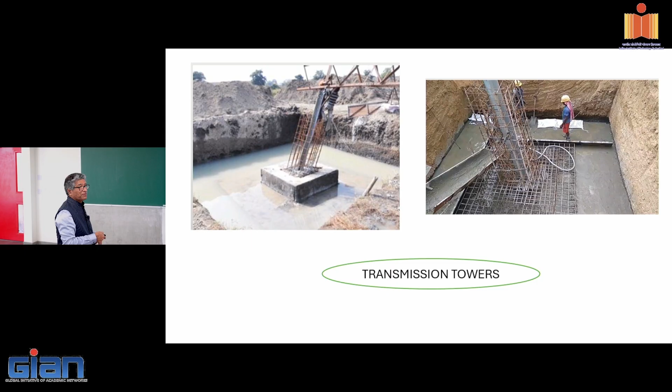But they said it is a pain for us to do this every 60 meters for thousands of kilometers. Can you do something in precast? I said okay, 70% precast, 30% cast-in-situ. They said no, we want totally precast.

So what we did: the 6 meter by 6 meter foundation, we broke it into 4 pieces, got them connected with dowel connections. Then the top portion, whichever was coming there, again broken into 2 pieces, got them connected with dowel connections.

And then the top portion, if you look at it, this portion comes up to that point, and then this portion comes in as the RCC column like this particular one. Again you have the dowels like that. All these are interconnected with that connection.

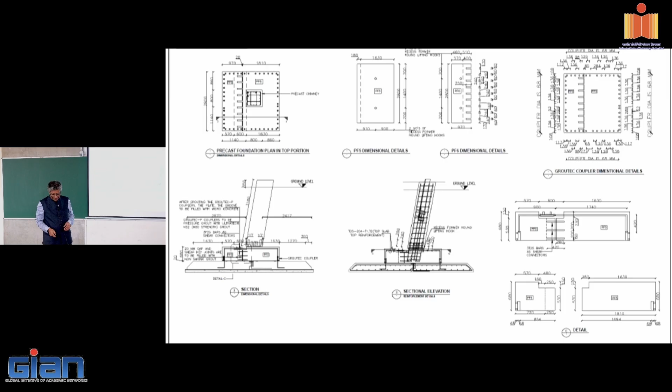Then the people said, please test it. Now you see the loads that are there: uplift is 3,812 kilonewtons, that is 381 metric tons. That's a huge uplift load which comes on that. There is also a shear force, longitudinal shear, and compression. We have to test everything.

So after doing all this, ATENA is one software - some of you doing PhD may use it - a wonderful software developed by one PhD professor from Czechoslovakia. Our professor C.B.K. Rao from NIT Warangal used this software.

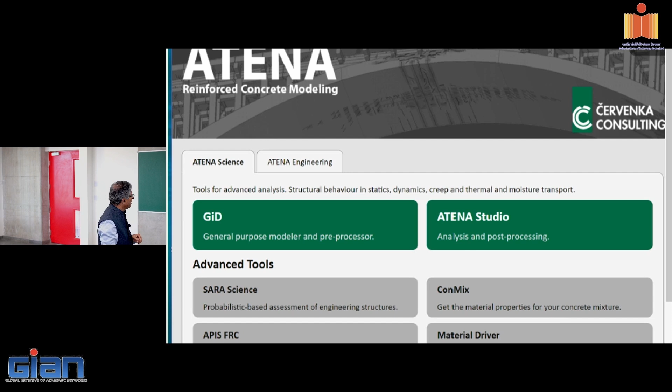He modeled the precasting exactly the way we had done it, and applied the forces to see what was happening there. The stresses produced matched exactly with what we got. No failure anywhere. We also showed this to the people who came from Russia.

And then we tested this. To test this element, we used the precast factory, where there are certain huge boxes. This is Professor Kameswar Rao, this is myself. About 1.8 meter by 1.8 meter by 3.6 meter box is a shear box which is used for tower cranes. When applying load there, it may buckle.

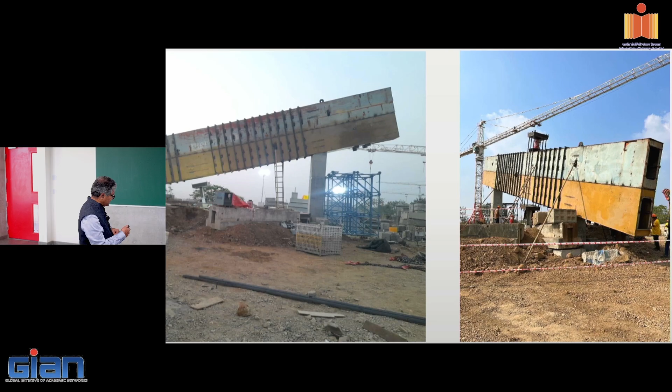So we thought of wrapping it with angles where we were going to apply the load. We also had another professor, Professor Gunesh Rao, and this is me. It was set up like this, with 2 elements tested independently - see the testing system also for precast. We applied the load on top of that transmission tower, and it succeeded, taking the load the way it should, and all that.

So precast is there into transmission towers.

They are going to build about 34 million square feet of leasable space in total. That is the big idea of the entirely precast structure they have undertaken, along with a huge precast factory setup over there which you can look into.

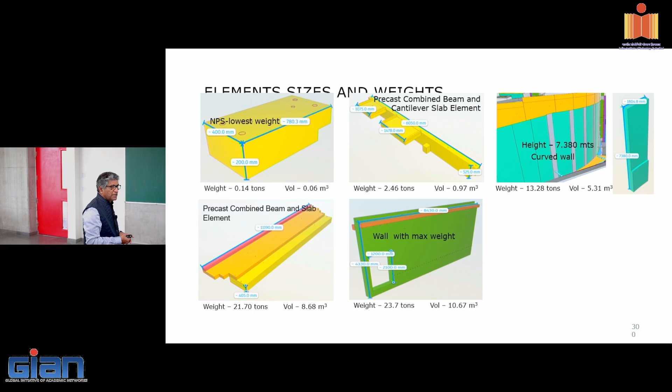This is how they have done these walls and various elements, and sometimes for flower pots they're using ultra high performance concrete. They have used stainless steel bars in the flower pots because being a flower pot, it may get water and the concrete may get damaged. So they thought it's better to use a stainless steel bar so they can forget about its damage throughout its lifetime.

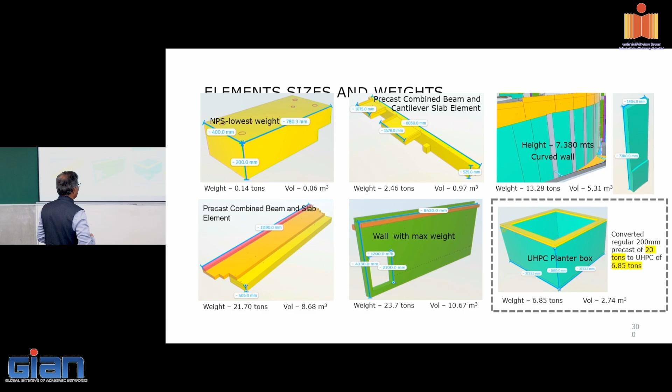Like that, they have done some innovations using various types of ultra high performance concrete, UHPC planter boxes like this. This is how these particular buildings are. The precast plant, some of the buildings - I think Preca might have shown it to you - it's a wonderful building that they have built in Odisha.

For Sri Sri, the meditation center. The beauty is that whenever you see this building as it goes up - I have taken the Odisha government people over there into this particular thing. Here they have taken the column and beam casting together, such that they can maintain that alignment.

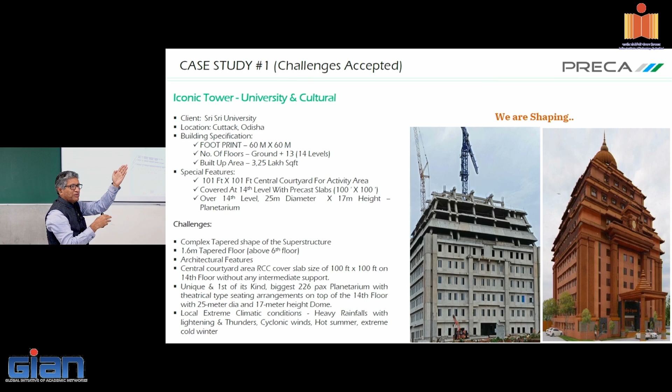This column going like this, beam coming like this - jointing is going to be a big problem. So they put both of them on the plan, casted it, lifted it, and then did it. So there's the beauty of another structure. That's how it has come, the beauty of this thing.

This we have seen already. Thank you very much. Any doubts? Questions? Most welcome.

I'll not bore you much with design because I'm told you're already given a lot of design inputs, but I've shown you briefly about design and the various structures which have come up.

Where were you in Dubai, sir? Which company were you in Dubai? I have worked with W.S. Atkins, Balfour Beatty, Engineers Office, like that, and also ADNOC. Oh yeah, beautiful company - 10 years with ADNOC. Okay, good, good.

In the corbel you recommend, sir, there you left a gap just for reinforcement, not for pouring concrete? In this picture there is a corbel, here beam will come, here slab will come - you left here as a free space. There is self-weight of the concrete there, it may tend to tilt, it may happen or not, sir. Here it is only reinforcement, here with concrete there is self-weight of this. So due to the self-weight, you have to take care of that during transportation carefully. Or else if you fully concrete it, what will happen, sir, in the factory? Then I have to leave the beam reinforcement outside.